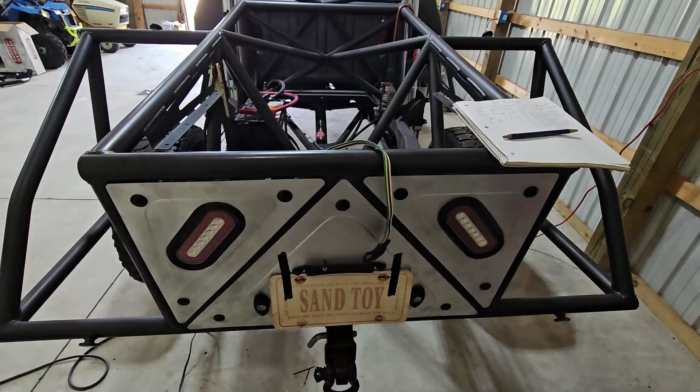So this one's going to be, I say short, but I have no idea whether it will be. This is more of an explanation of my lighting setup for the brake lights.

On the back here, I have these basically dot oval lights that you can get almost at any parts store. They're your typical dot lights you'd find on semi trucks, very readily available and easy to come by. These ones are dual brake, tail, and turn signal. The center here is orange.

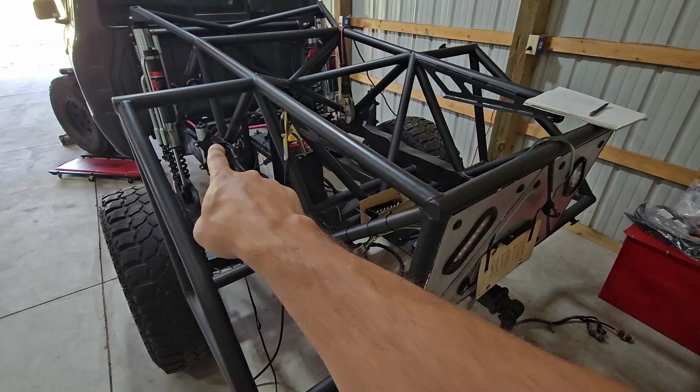This is more going to be about going over the wiring back here for this. I am basically reusing the factory chassis harness that went from under the cab back there, and that comes from two plugs that come out of the cab to the frame rail, and it follows all the way down the frame rail here to this area right here.

Now this truck is extended 1.5 feet, I believe, because the frame was chopped here and then extended out since there was a slightly bad section at the back. So eventually this truck will get bedsides on it with the factory taillight, and I want to keep it that way. But for the time being, to get this truck running and driving, bedsides are the least of my concern.

So when they did the work, when Linkinger did the work, they put the lights that I had temporarily on the bumper that was back here. They made panels and put all the lights in, which I'm happy about. So here's where the changes happen.

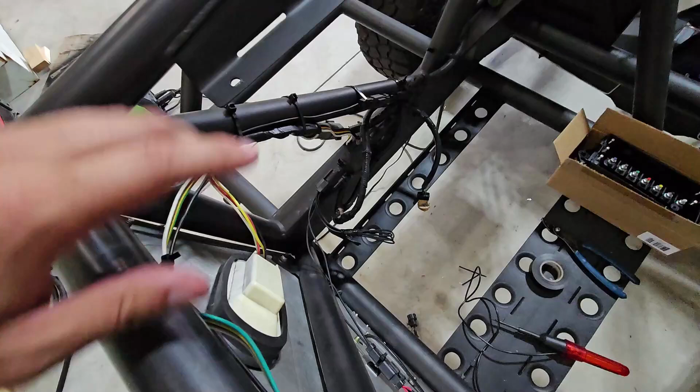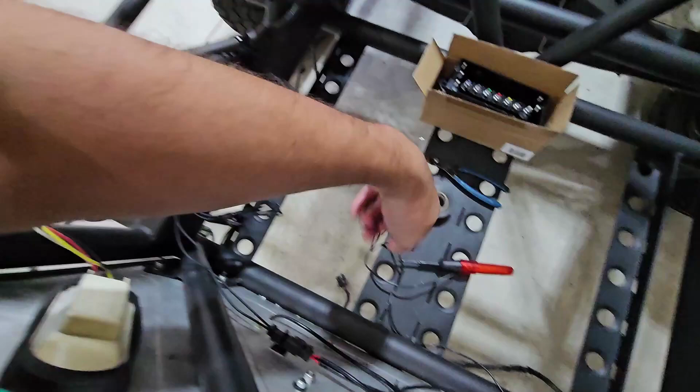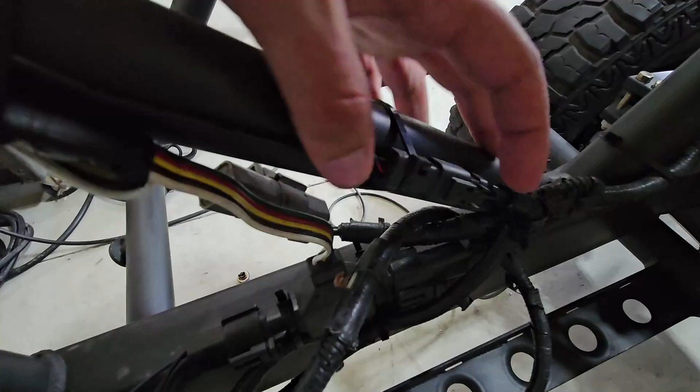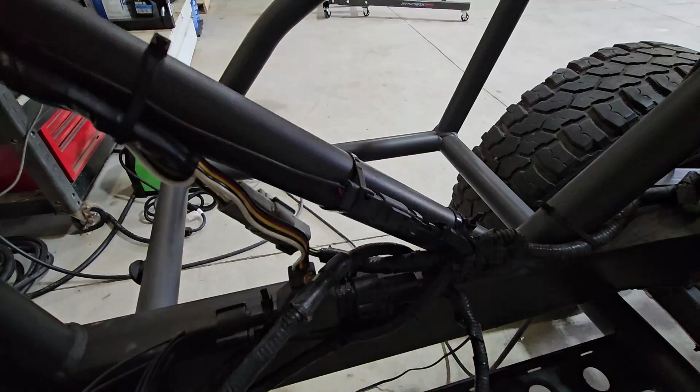This is one of the factory license plate lights that would go into the bumper, it would be like here. It's no longer getting a bumper like that. So right here, you can kind of see a Deutsch 2-pin connector that I plugged in for the license plate light. It comes up over, goes through the panel there, and on the other side there's a cheap LED license plate light off Amazon for about $9. 2-pin connector, done, bada bing bada boom.

This right here is a sort of trailer light splitter, and I bought it from Reese, but Reese is now out of business, so you can't get this. But I believe Curt makes one like this.

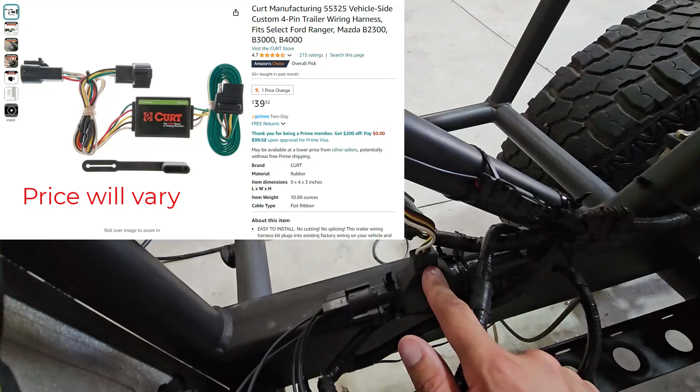Now, one thing I have to state, this truck being a 98, I believe this wiring setup is the same from 93 to 98. This truck has a dedicated turn signal - that's what those are. The 99s and newer, all the way to 2011, all have the turn signal as part of the brake light, so they do dual functions. For some reason, they put a dedicated turn signal from 93 to 98 on these trucks. So I'm pretty sure the wiring is the same between those years, but I'm not 100% sure - let me know in the comments on your model and if they are the same as what I'm about to present.

So I'll try and find the Curt part number to get this splitter. If you see it on your screen, you'll see it; if you don't, then I didn't find one.

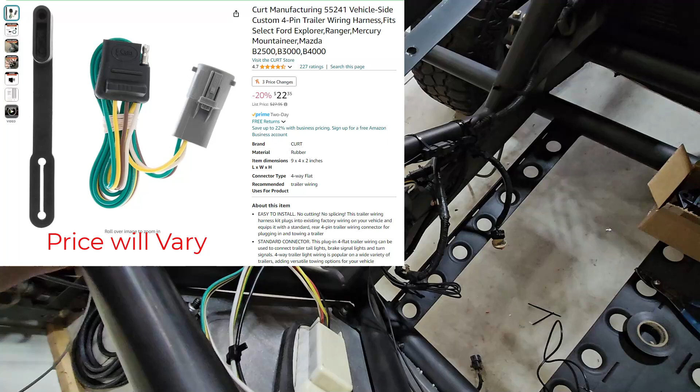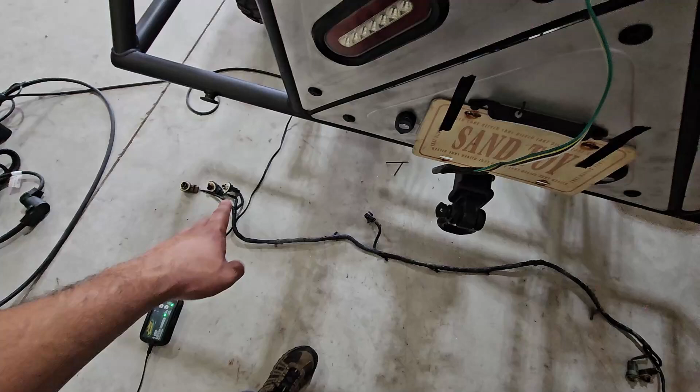Right here, this gray connector is basically the factory connector to make an adapter to a 4-flat, that's also from Reese - again, Reese is out of business, so I'm trying to find a replacement from Curt. I believe they still make them. But basically, the black connector here is for all the taillights on the factory harness, which is down there. That's your factory harness that plugged into that plug and then went through the frame rail back here and up to the bed sides when it was on a factory vehicle.

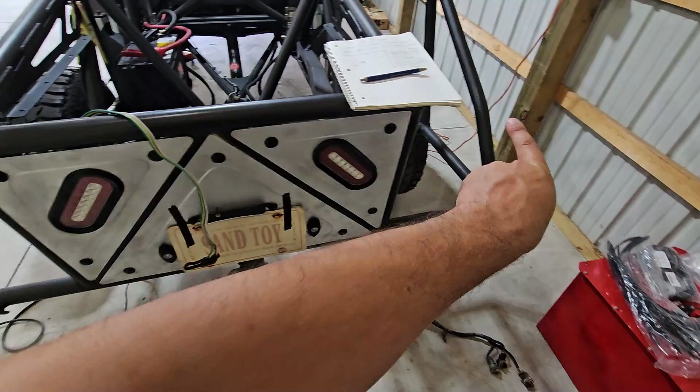This harness I'll keep for later, for when I actually put bed sides on, to put the lights out there. But for right now, that connector gives you turn signal, brake light, reverse light, both sides. I don't want to destroy that - it's a good harness there.

So what I did is I got this splitter because I cut the junction box that turned the brake light and turn signals into the same light for when it would go to a 4-flat.

Got these dot lights, so they have brake light, tail lights, and turn signals all in one. So wire that into there. Now, the biggest problem I have is this splitter doesn't have reverse light split off of it.

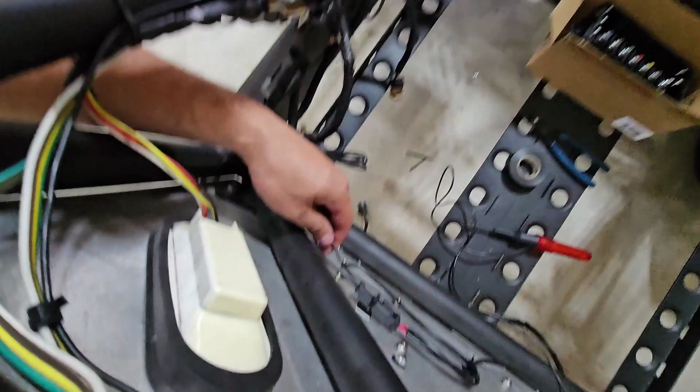So right here you see I have a pigtail. This is, I think, the male pigtail. I'll put the part number and picture up on your screen. This is the male pigtail that plugs into this T, which sort of extends it a little bit. Right now, as you can see, it is only wired into the reverse lights I have on the back here. These little rock lights are my reverse lights, that's what I use.

These wires are all the left and right brake and tail/running lights, for if I choose to use this to make more lights somewhere, or I possibly will unplug this and modify this harness to then plug in these reverse lights and also use it for going to bed sides.

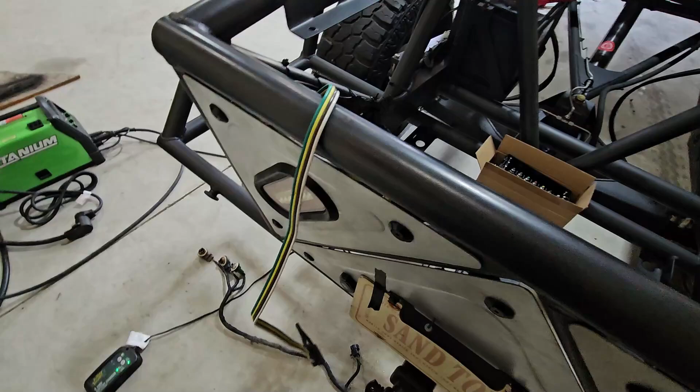So this is what I would call temporary permanent. Kind of a stupid way to put it, but I call it temporary permanent because I temporarily did this for future use, so it's easy to unplug and change out and maybe modify it. But going to the pin out of this plug right here, so this is what I have written down.

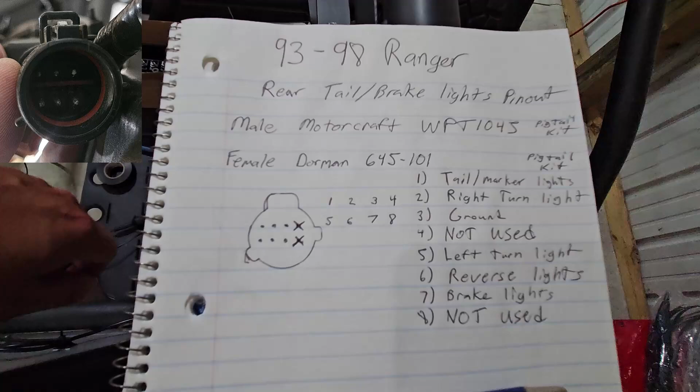It should be, I believe, the same from 93 to 98. I'm not 100%. Anyone who can confirm this in the comments, please do so, and I'll pin it.

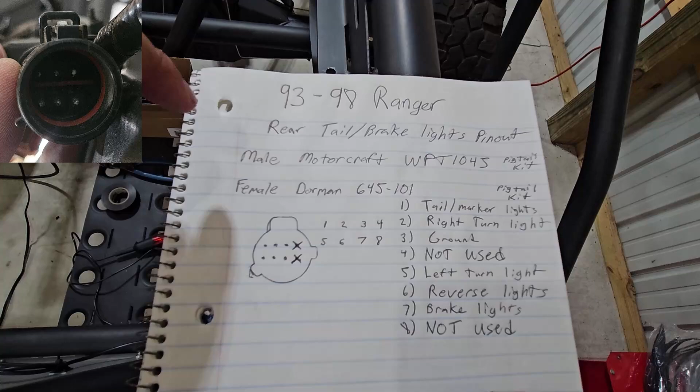The male connector, which is that one there, that is the part number for a pigtail, which is basically the plug-in, and you get the bundle of wires that you can connect to. And this is the pin out of that.

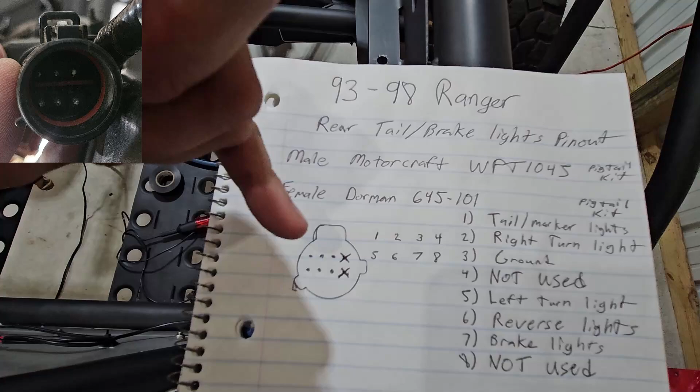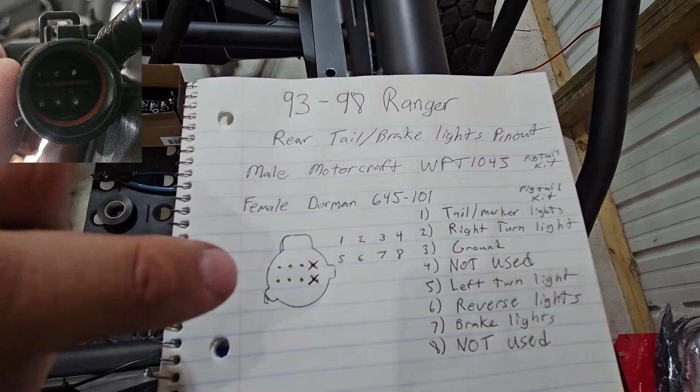So you got your keyways there, and that's the locking tab. If you look at it just looking into the plug down there, I'll put a picture up. When you look into that plug, it can hold 8 wires, but only 6 are used. As you can see, 2 of them are crossed out.

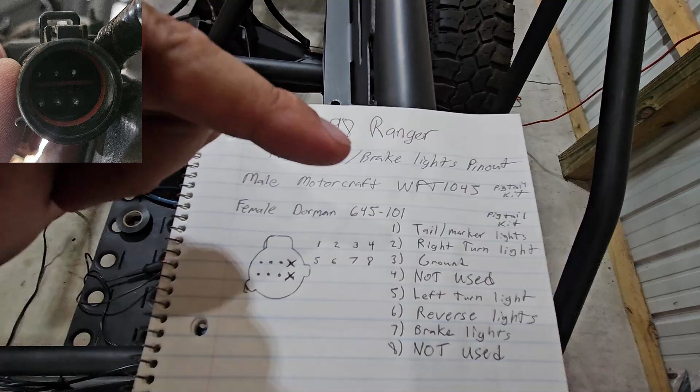So you see my list here, I already went through and ran to see which was what. So the tail marker, number 1, that would be that pin kind of at the end of my finger. That is your running lights, marker lights, whatever you want to call them, for night. Pin 2, which is the one right next to it at the top there, is your dedicated right turn signal. 3 is your ground.

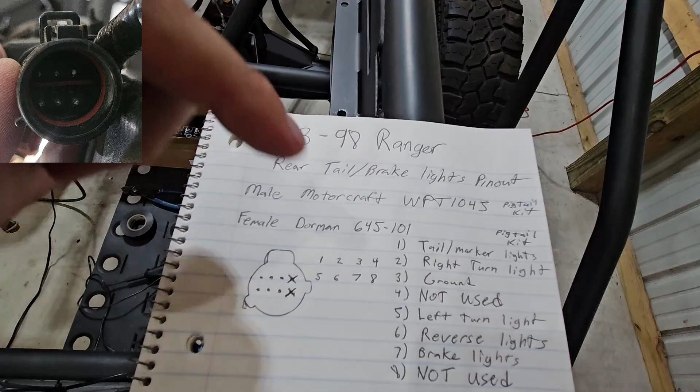Now technically, the way I have this truck now is with the battery, I have a battery cable going right to the frame. So technically, the ground here, I could just take this off and ground it to here, and then everywhere there's a ground on one of these lights, I could just ground it right to one of these bolts if I wanted to, because everywhere metal on this truck is technically a ground.

I don't have to have a dedicated ground, but I'm using it for the reverse lights right now because of the T there. So there is a dedicated ground back here for the lights that comes from the cab.

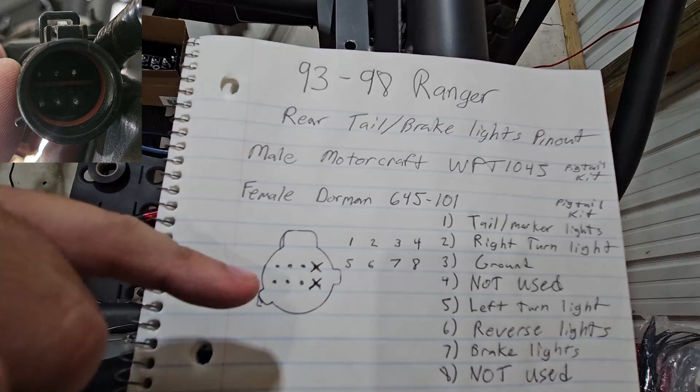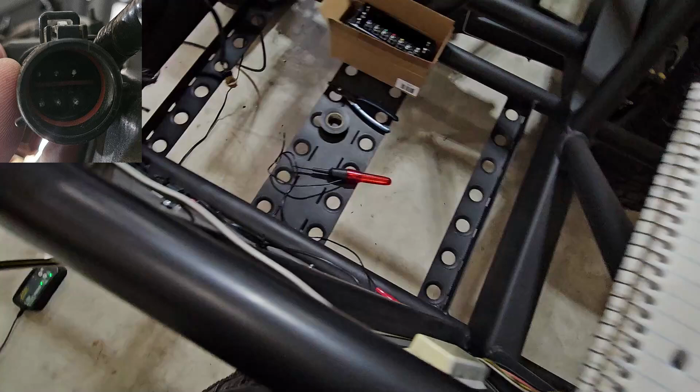So when you look at this pin out, 3 is the ground, 4 is not used, 5, which is the left turn at the end of my pinky, is dedicated left turn, and 6 is the reverse lights, which is what this is set up as right now. So you can see you got red and ground, whereas here you just have both black wires.

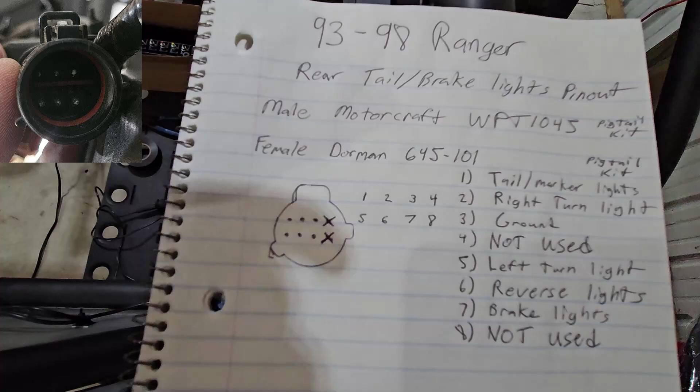I only pay attention to the pin out of the connector, it's dedicated, telling me which one is which. Wire color, it's annoying to deal with having the same wire color, but it is what it is. So pin 6 is the reverse lights, and pin 7 is the brake lights. That's how I have it numbered and how I have it listed.

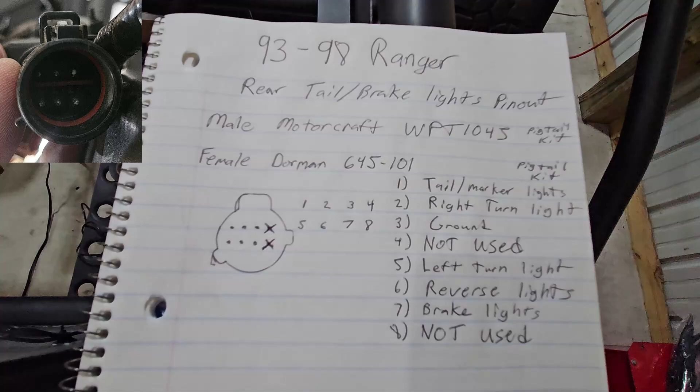As you can see from the write, Dorman is the female pigtail number, which, if you haven't known already, this plug is literally the same plug as the one for the fuel pump way over there that I have to extend. I have the pigtail for that to extend the wires for the fuel level and the fuel pump, which is going to be a separate video of wiring that into the factory harness of this truck.

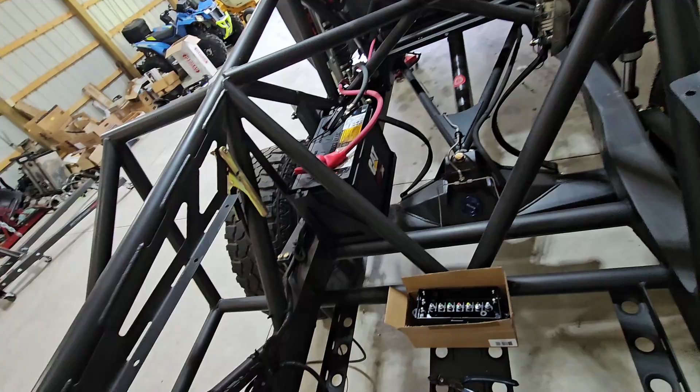So it's split off here for the brake lights and tail lights. I have this plug here. The excess wires are taped off right now and going to be zip tied up along with this right here for temporary reasons, in case in the future I choose to change it some way, shape, or form.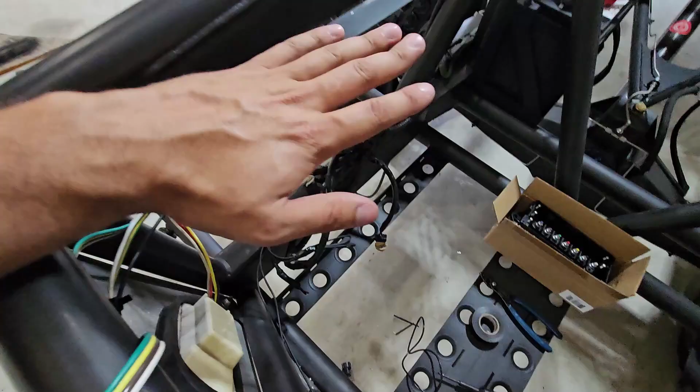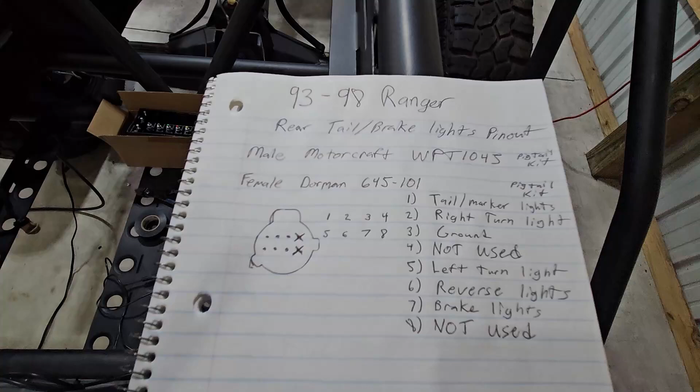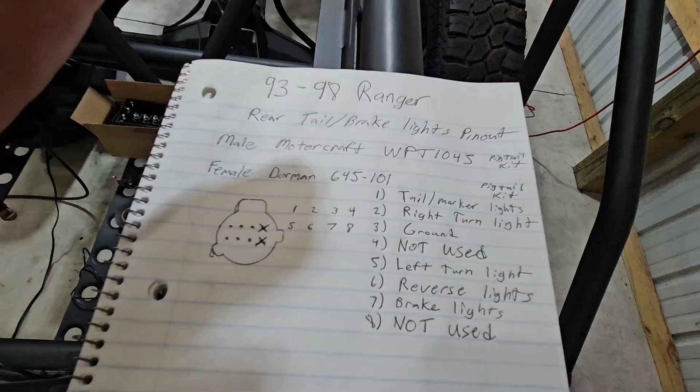I'm going to keep this for my documentation of the wiring pinout. Hopefully this helps somebody with wiring their own taillights or changing the rear taillights. It's very simple because everything gets the ground, and you have your dedicated left and right turn signal, the marker, tail lights, reverse lights, and brake lights. Very simple. I was just using a test light to probe it as I had the vehicle powered up.

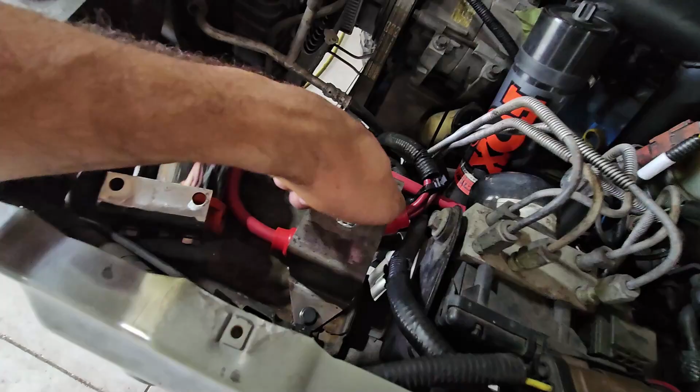Mostly the vehicle is done for power systems, so give you kind of like right here, disconnect. It's on the power side. I'll go over the power wiring. You can hear it.

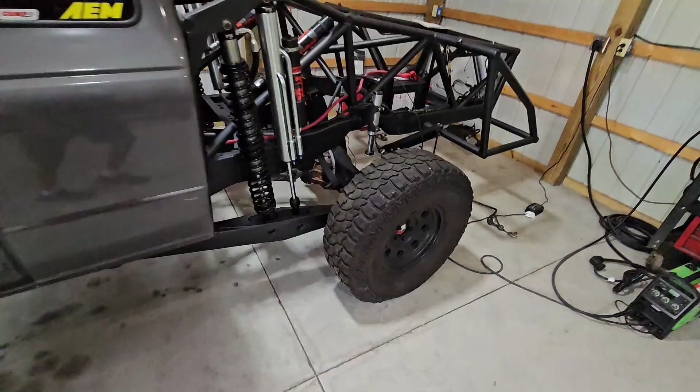This is the way it's set up. You can turn on the lights, tail marker, you get all that. So that's all set up.

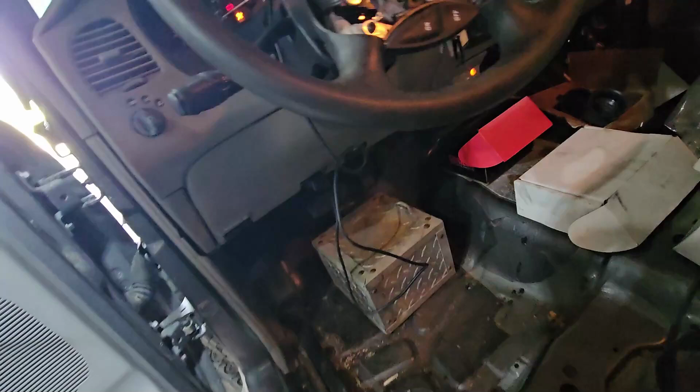The one thing you will have to do is, with having LED tail lights back there for the turn signal, you need to change this flasher, which I have a picture of, underneath behind this panel. You need an LED flasher. This is the factory flasher, can't use it with any LEDs. It just makes the flasher freak out because the LEDs don't have enough load to actually make it flash.

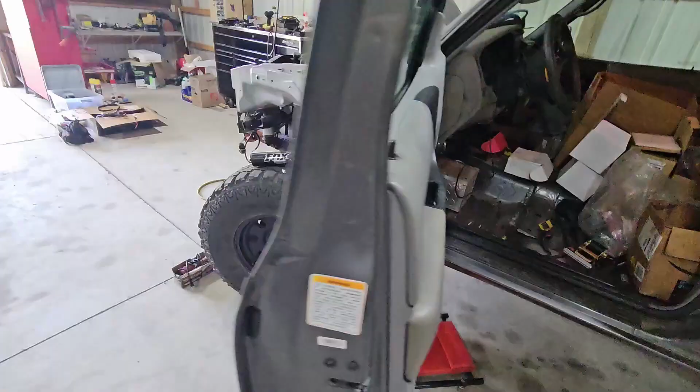So that's where you get the emergency lights on. Those bulbs are there temporarily for making sure the wiring is correct, and you have those back there. The 4 flat works, everything's wired correctly.

I can shove this for the brake lights. Oh, it didn't stay. So, it didn't stay for very long. Ah, okay, oh come on. So, yeah, brake light there. Brake light there.

We can turn off the lights, put it in reverse. See, reverse lights, pretty bright. Take the brake off. And that's pretty much it for that. You can see the brakes are off, lights are off, and just reverse lights are on.

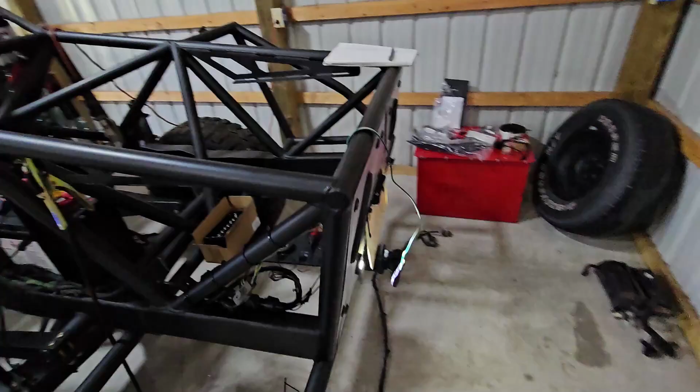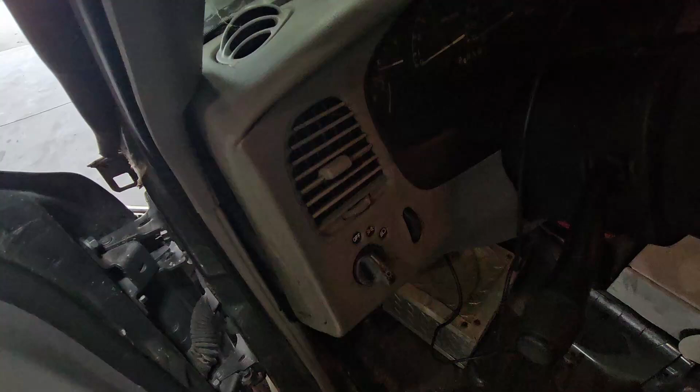So it is set up factory. Just set up factory. And right now I'll just disconnect that.

That's pretty much it, kind of simple, kind of self-explanatory. Hopefully that pinout that I made there will help you. That's basically how I have the pigtail ends, using butt connectors, heat shrink, and electrical tape to connect the wires together, have it routed this way, and it's very removable, friendly with the plugs and connectors. Everything's organized and it looks like factory.

So these will get tied up here. These two are not used, so I'll tie them up out of the way just in case I might need to use this pigtail for something later. And that's basically how the rear lights are going to be set up for the time being, until I get bedsides on them.

So that's pretty much the rear lights, how they are set up, how it's going to run for now. This is also set up for a small trailer if I need to. This is the pinout for that connector.

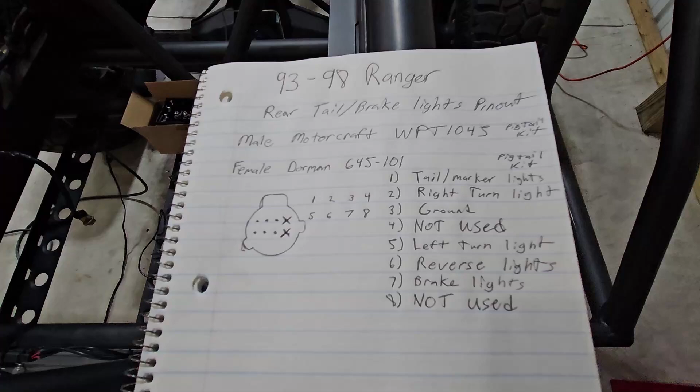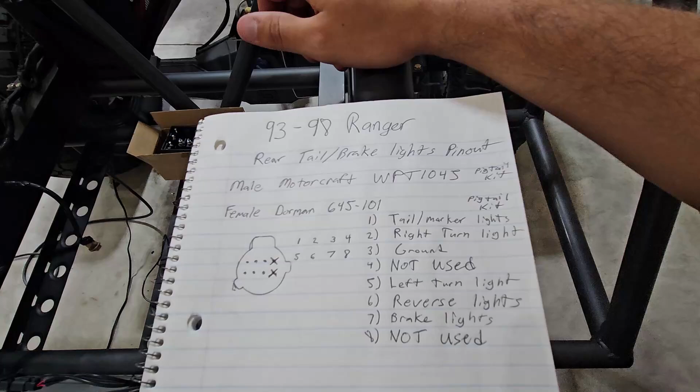Hopefully this helps. I would like to see if people can help me out to make sure it's these year ranges - I'm pretty sure it's the same for like 95 to 98, but I'm not 100% with 93, 94 Rangers that have a dedicated turn signal light on the back side of the bed. So let me know in the comments.

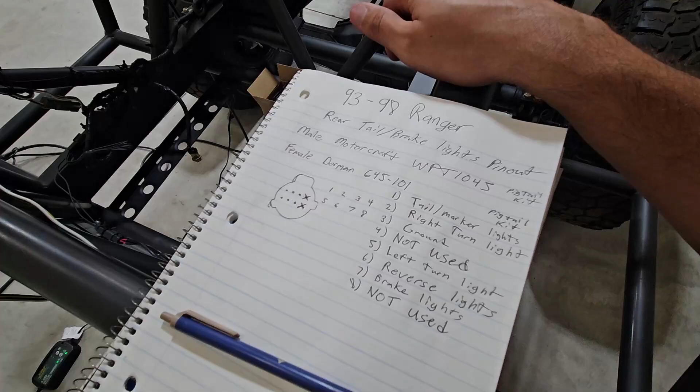Hopefully this helps. I want to do more of just dissecting the factory wiring and using it to my advantage without completely redoing everything. So that's how it is, that's how I have mine set up. It's the way I'm going to leave it, and I can easily change it in the future because I have this information and make my own harness.

I wanted to try and put out as much information as possible for factory wiring, to utilize the wiring to my advantage and make it look and function as factory. So for right now, this is the way I'm having it set up. Everything's set up, everything works. Until I get the bedsides on, I'm going to store this harness.